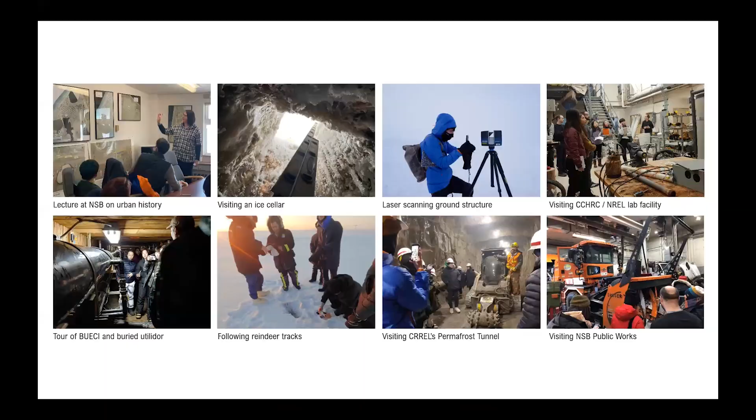We try to understand the ways in which we can learn about the context in which the city functions and what challenges it's facing, and importantly, having students bring their inquisitive curiosity into the conversation to understand and question practices that are currently underway.

So the first thing to frame a perspective for the project is to understand this is Utqiagvik in the wintertime, and this is basically the conditions underground—we have ice-rich permafrost.

This is the CRREL Tunnel in Fairbanks, which we take our students to, and CRREL has been very generous in bringing us through to see these large ice lenses down in the ground in this silt typology of ground. It's a fascinating place to understand the binary between the surface and the ground.

The essential part—which Kevin, I'm glad you're talking about in great detail—is the essential nature of water within the Arctic in terms of controlling and determining the stability of permafrost, which is the fundamental issue at stake: water in its various forms, from liquid to vapor to snow in its different states. That's the essential part, as Torre Jorgenson drilled into our heads many years ago in talks in Fairbanks.

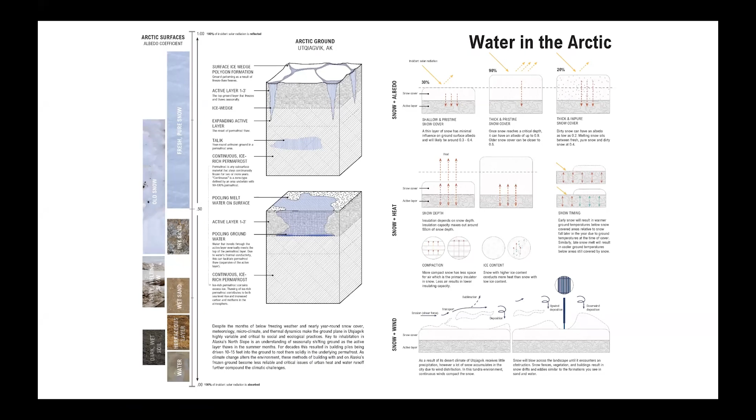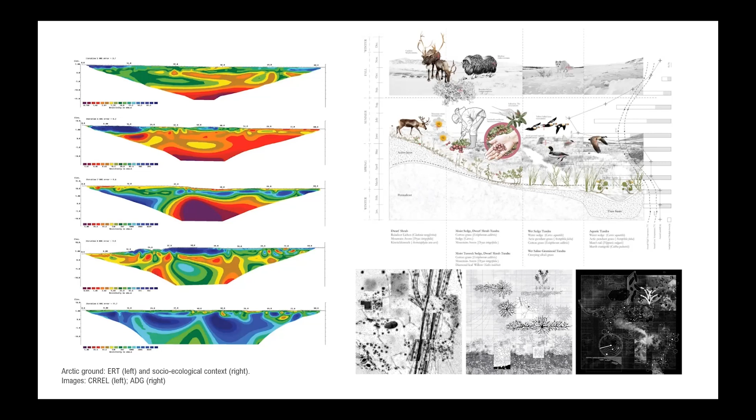Design, again I'll underscore, isn't about solving technical problems—it's about looking at the cultural and social value of design. It's both, yes.

This is Utqiagvik, and we're going to show you—we've got basically four key sites: TNHA, which is a 29-plex housing; BUECI headquarters, the main utility; and the hospital, Samuel Simmonds Memorial Hospital, and also BEO. We've got a control site outside of town. We're just focusing on TNHA.

We've got micromet stations, terrestrial ground moisture and temperature probes, as well as geophysical measurements—resistivity and GPR beneath TNHA. And then just to cut it quickly, because I know we're going to blaze through time here.

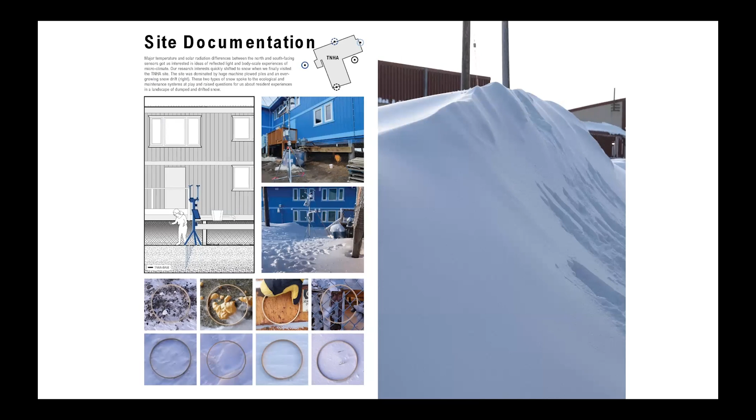What's also interesting is to see the different ways snow is accumulating around the building through natural drifting. This happens in this courtyard, one direction from the west. We've been modeling the location of natural drifting, but also the maintenance practices, where snow is actually plowed and pushed in the city. Maintenance is the essential actor here.

As Kevin was mentioning, this is a great lead-up to what we're looking at as designers: how do we begin to think about maintenance as an essential design tool, not only in terms of preserving and maintaining ground conditions, but also how people might move within a landscape that's being maintained so heavily during the winter and during spring breakup.

Just to say a few things: the red piles are machine-piled snow piles, and the green is the naturally drifted snow. The one on the left top corner is 20 feet high, measured last March. The one on the right, the red pile, is about 12 feet high. The naturally drifted snow we measured at 8 feet.

These are pretty significant sizes that have the potential to change the ground thermal regime, as well as impacting the physical accessibility of people, as well as views from the indoors of the houses, which is in the middle.

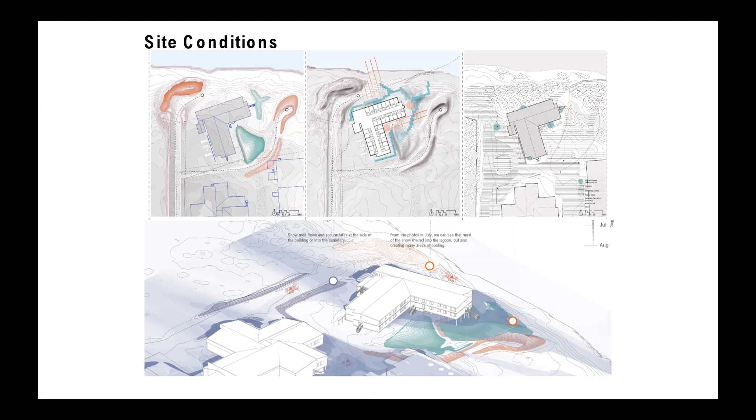Go to the next one. As Matthew was saying, we were looking at different ways public works are using their equipment and locally available resources to work with this snow and the meltwater process.

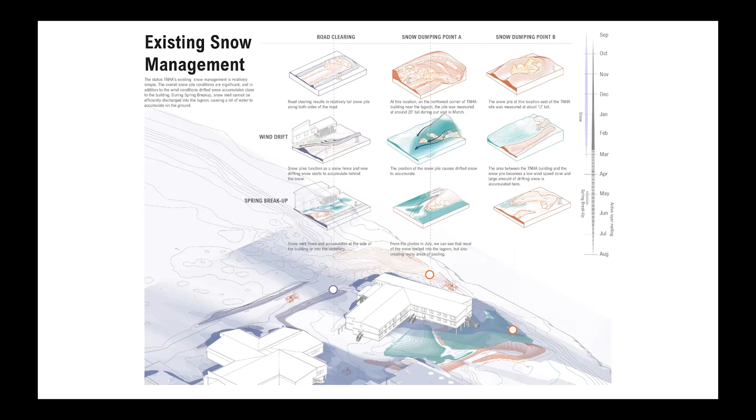If you think about it, go to the next one, the series of different tools they already have in stock, from front loaders to their customized road graders, are in a way tools for, I would say, permafrost preservation, potentially by minimizing permafrost degradation.

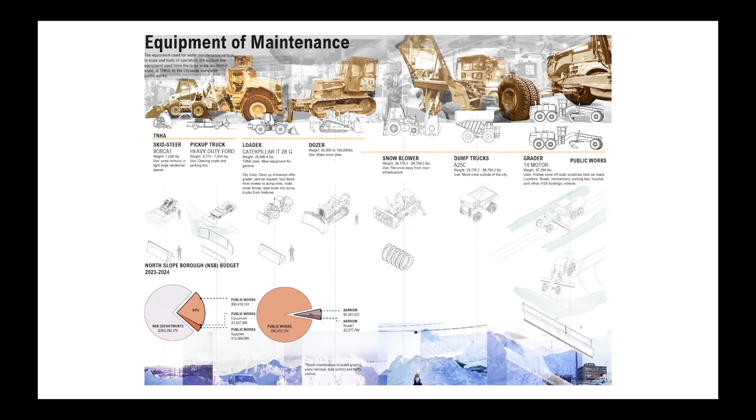Next one. Some of the things we've been thinking about is how can we begin to expand the maintenance regime, back to what Kevin was saying, thinking about how the snow piles they make can be smaller, so it reduces or doesn't interfere with the insulating capacity of the snow, therefore making the ground colder.

To, if it's going to be bigger piles of snow, as in the second column, push it all the way towards the lagoons, so that the meltwater is not draining towards the foundation of the building, for example. These are some of the things we've been thinking about along with our students.

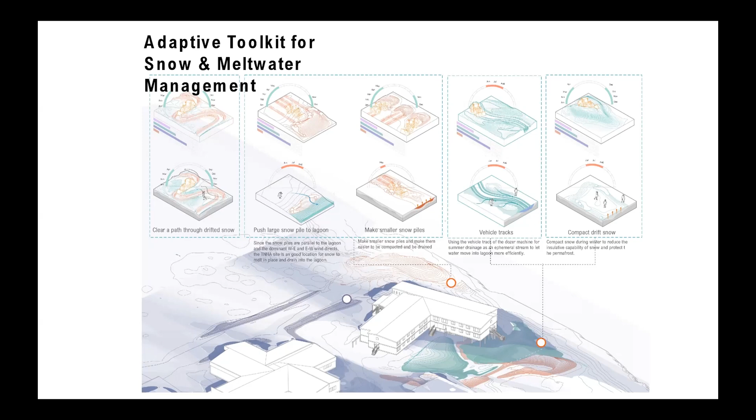In the urban scale, what you see in the orange short lines are the locations of all the existing culverts. So if you expand all of these at the urban scale, placing the snow dump sites in line with where the drainage sites are, go to the next one.

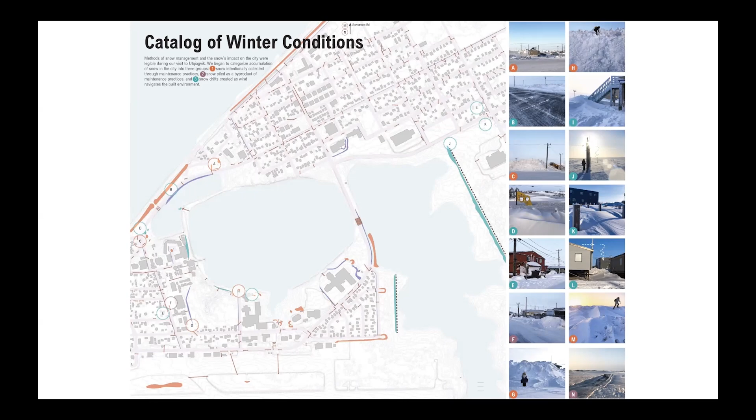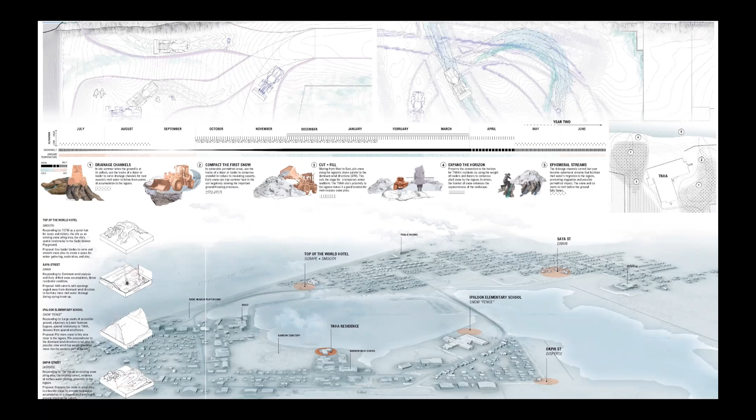In a way, thinking about scraping the ground clear, allowing cold air temperature in the wintertime to overfreeze the ground, and then compacting snow, changing its thermal properties, is an essential tool that can be used in terms of mediating ground conditions and permafrost stability.

Going on to the hospital site, we're going to jump through here, looking at some of the sensor locations we have: micromet stations, ground temperature probes, as well as geophysical measurements that are underway.

This is a really dense diagram, but to quickly summarize, these are three locations in the building. This shows depth, and over time, the ground moisture content. What's really important here is this tiny drawing at the top, which shows our BEO control site. The size of the circles tells you the moisture content of the ground.

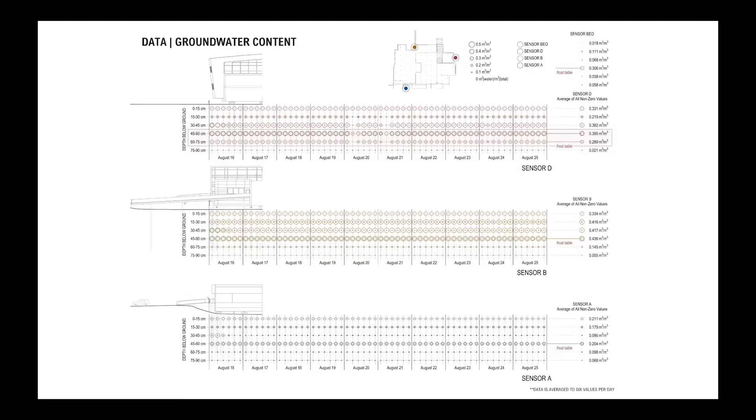What you basically see is there are bigger circles around the hospital site than at our control site—in other words, there's a lot more water. What's weird about the BO, the hospital site, is it's built in a bowl, so water accumulates in this bowl. It's plowed, and it's a big problem for them. We've been working with ASNA to look at ways to remediate the situation.

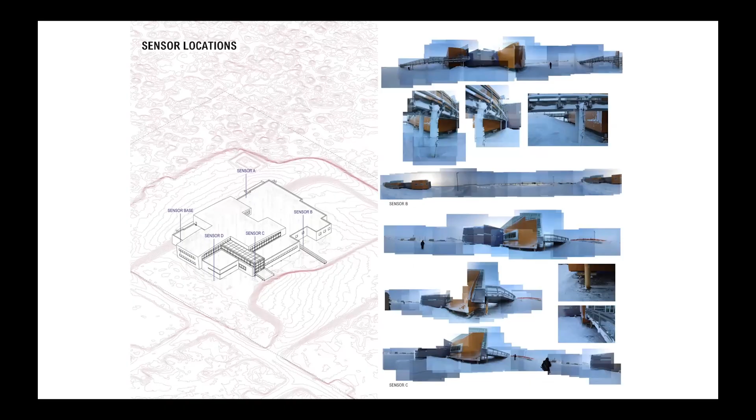It's important to think about ways the space can be activated, not just solving a drainage problem. Another interesting footnote is looking at the impact of a road, where the introduction of a road and drifting snow accumulation creates increased degradation of permafrost through increased snow and melting, affecting the energy balance of the surface.

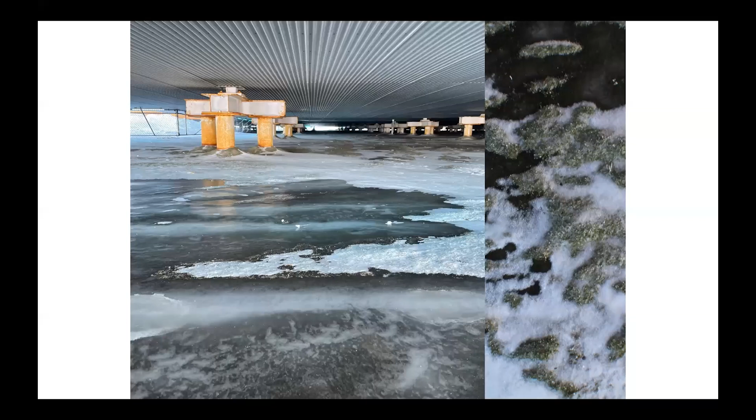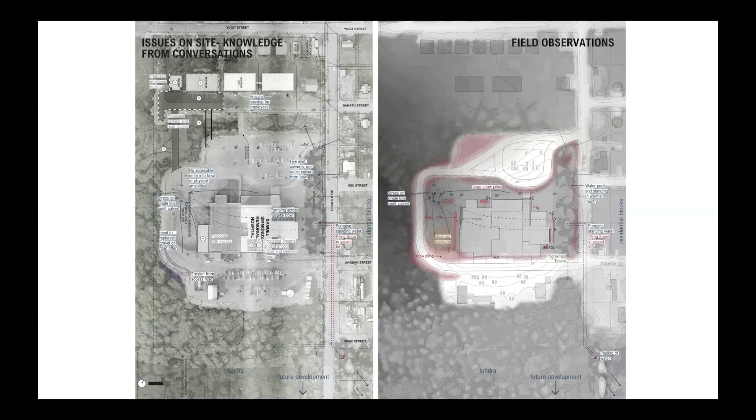They pointed out a number of issues of concern, and we began doing analysis and studying the site, understanding where snow is accumulating and thinking about the drainage problem. There's also a problem in terms of the hospital being central to the town, but there's no way to actually engage other than going inside.

So what we did is start with the drainage problem first - this is just modeling surface drainage. Then we looked at how we can activate the space around the hospital for people, while also solving the drainage problem.

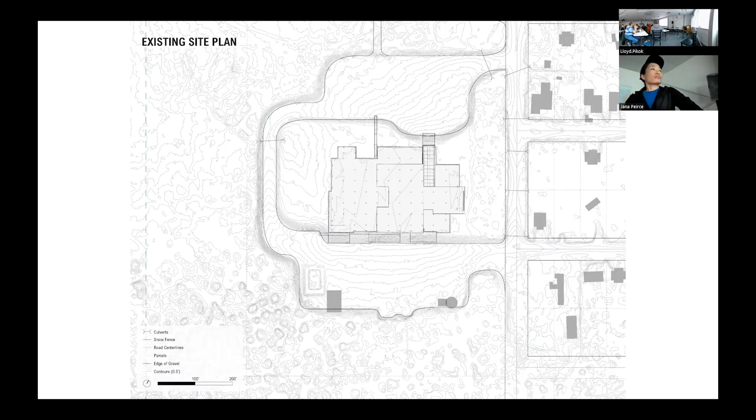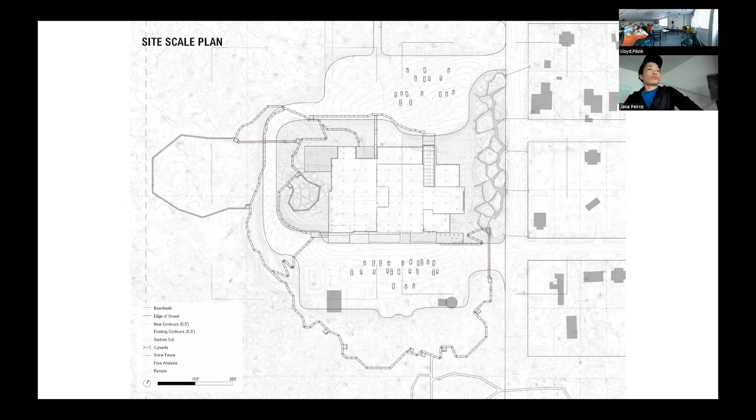We started looking at programmatically thinking about a path and a trail and gardens that become health and well-being spaces, which is what they wanted. We began to think of that as a way to link what's going on in the interior to the exterior spaces.

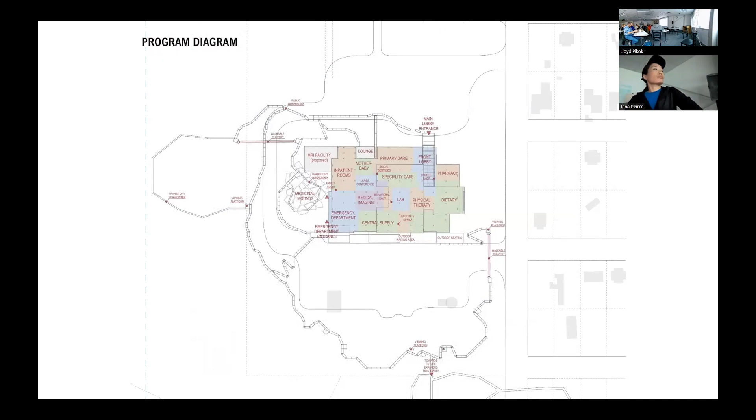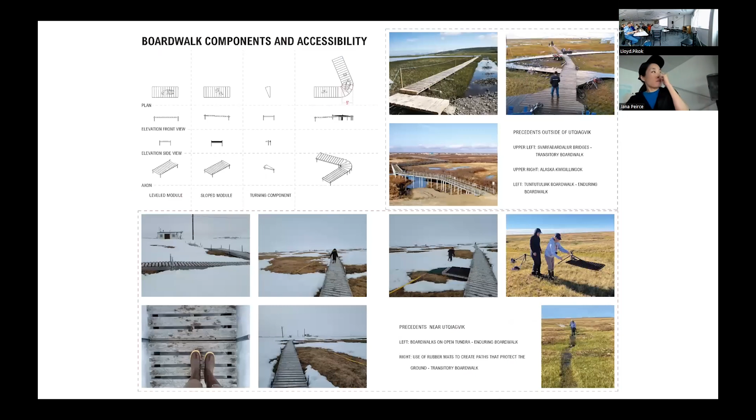That then changed the drainage pattern on the ground, because those paths are actually controlling where water is flowing. You can see more focused drainage compared to the earlier version, and then thinking about the design of the path itself as a key activation element. That's zooming through it super fast, but it should give an idea of what we're trying to do.

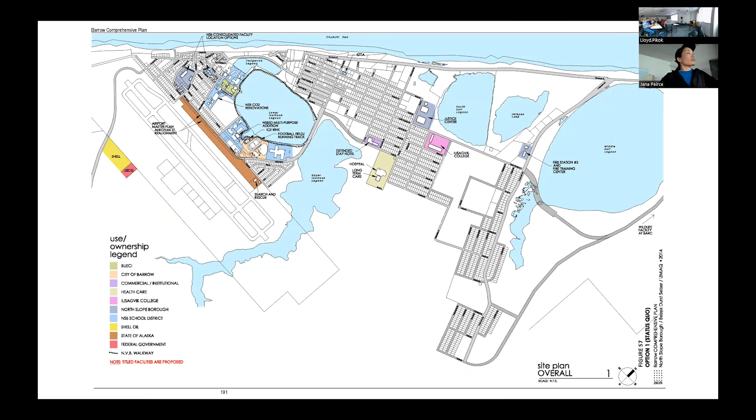This is from the comprehensive plan of Utqiagvik, showing the future expansion of the town. So we know where the hospital is - it's here.

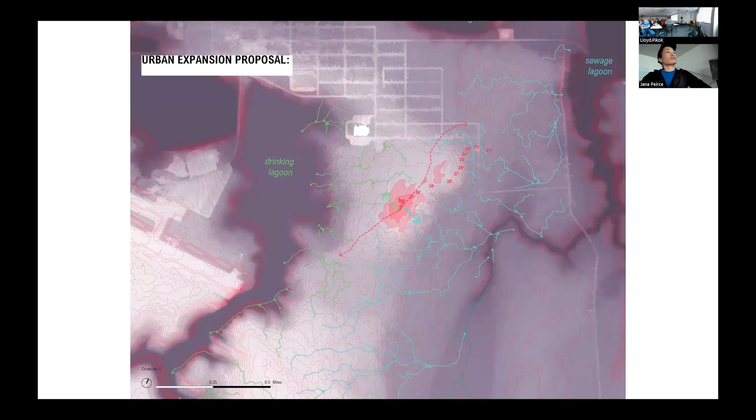What we did is shift the frame, looking at the grade topography of the site, drainage, where the watersheds are, and how water would flow in that area. Instead of continuing with a linear, rectilinear planning strategy, why not think about a planning strategy that conforms more to the natural drainage patterns of the tundra itself.

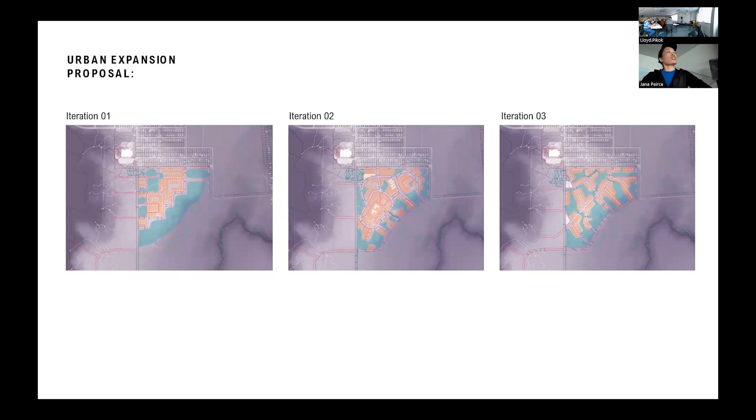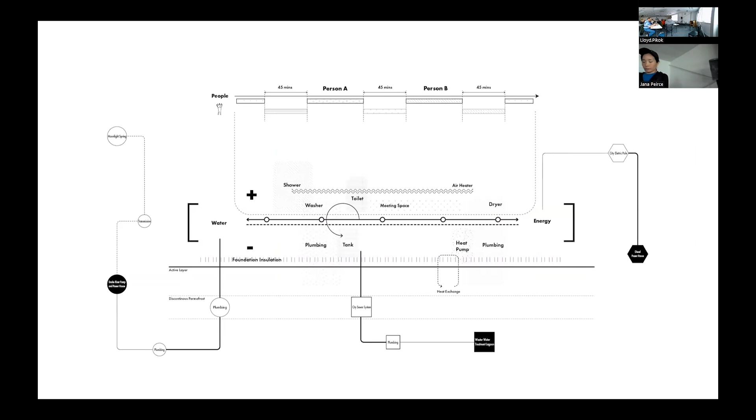The last thing we'll talk about briefly is our approach to architecture and design in buildings generally. This is a drawing that explains the systems at work in a building, thinking about human interactions as well as energy and other functional, technical aspects.

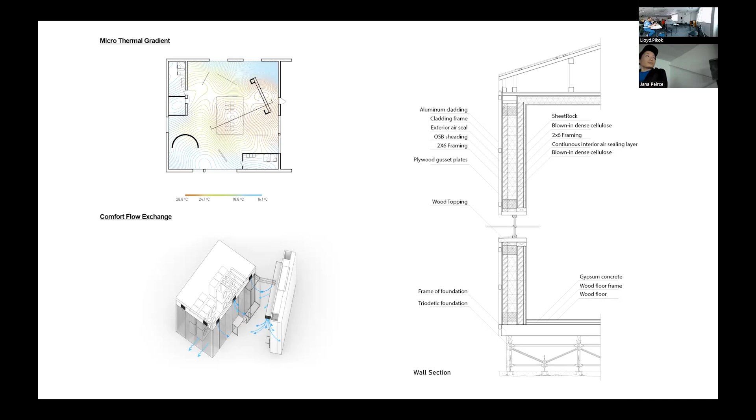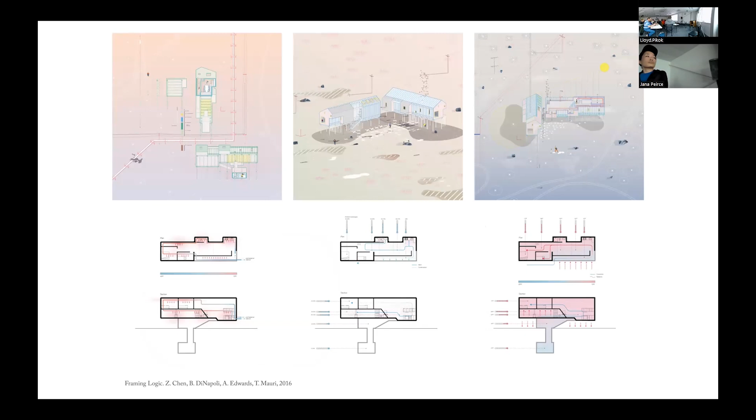When we draw plans and sections of buildings, we think about not only the energy balance but also the way people are potentially catalyzing the usage of space. This is a house that was designed showing the thermal and vapor pressure conditions within the house, but also the spaces for living and engagement.

I'm thinking about how we create homes that are spaces people want to be in, that prioritize the use and cultural needs they have, as well as solving the technical and engineering challenges that exist. So just to wrap up, this is a summary of what defines our approach.

What is essential, we believe, is coupling of Arctic landscape and built environment. Those two things need to be understood to address the challenges of global climate change. We really believe there's an imperative at the moment to question design conventions usually imported from temperate latitudes.

But also importantly, what happens in the Arctic is that often, because of logistical challenges, the designs produced for housing and other structures prioritize overcoming logistical and economic challenges as opposed to designing spaces for the people occupying them, which is very different.

Collaboration is an essential part of bringing action-oriented change to people and communities in the North. Cultural and social benefit is of equal or greater importance to technological innovation for the built environment - this is really important. Hands down, make a building less efficient if it makes it better and healthier for the people living there.

I think that's a great idea. I'll end there. Thank you.